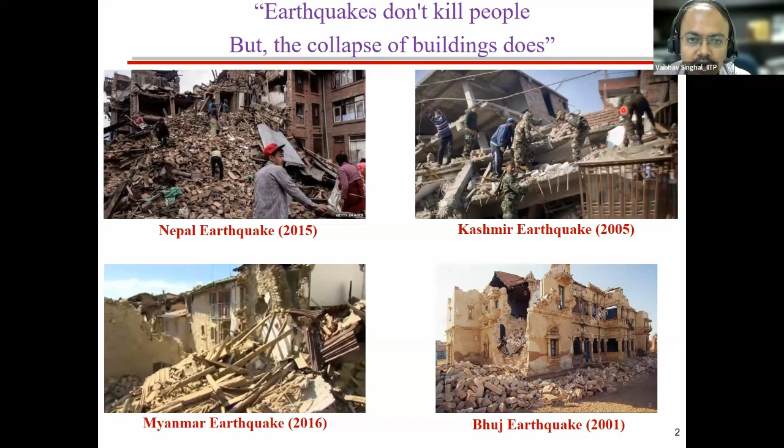Even some of the modern masonry materials which we use for infill — most of you have seen — are participants allowed to speak, Dr. Praveen? No sir, not in between, okay, but they can ask questions later.

For the strengthening of masonry, or of any civil engineering structure, there are many techniques, but they can be classified into two major groups. One is what we call the epoxy-based technique. I'm talking about externally bonded methods, not about improving strength by grouting or other methods. I'll talk about techniques where we apply the strengthening over the surface using a bonding agent. This bonding agent can be epoxy-based — we use various types of epoxies available in the market — or the bonding agent can be a cementitious matrix.

This has become a new material and a new area for research. In the last 10-15 years a lot of work has been done, and many countries have come up with codes for strengthening using the cementitious matrix.

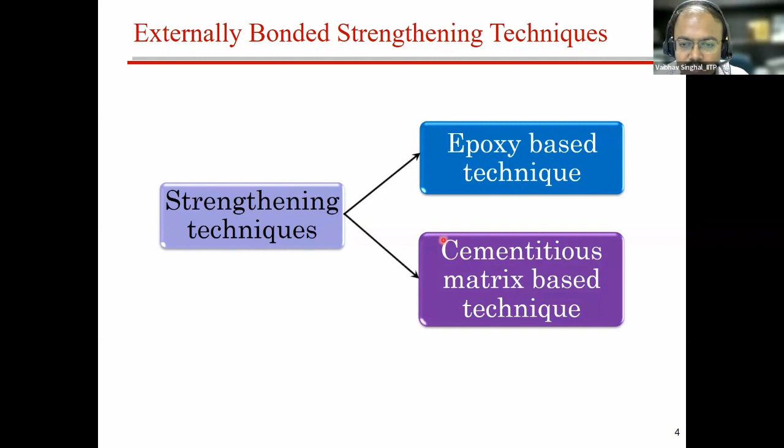Now, why has the cementitious matrix become popular in the last 10 years?

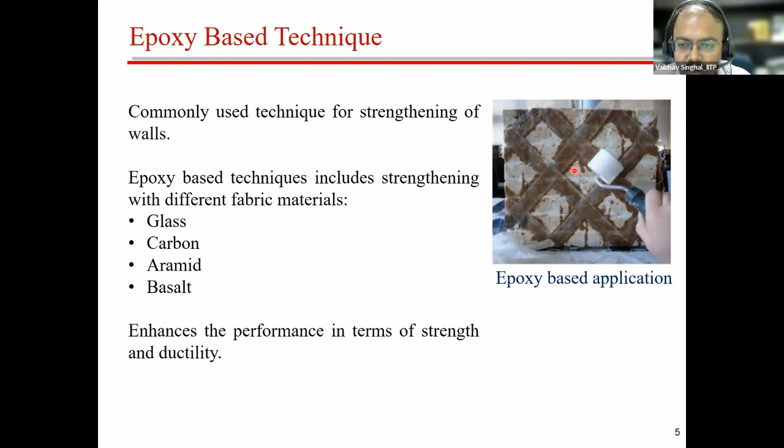The major problem seen especially with epoxy based systems - here is an example of an epoxy based application. You can see a fabric, which can be carbon, glass, or a different material, and it is applied over the masonry surface or any surface using a bonding agent, which is an epoxy based bonding agent.

The major problem with epoxy based systems is the requirement of highly skilled manpower. A normal mason cannot handle the epoxy properly for mixing and application. There can also be emission of toxic gases, and many times the epoxy, especially low cost epoxy, is vulnerable to fire. Also, a lot of surface preparation is needed - the surface should be properly smoothened and cleaned before application of any epoxy based bonding agent.

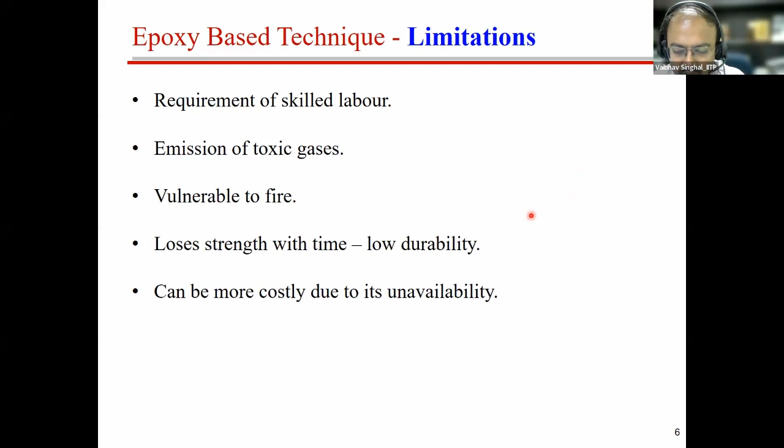There can be different application methods. Let's say this is my masonry surface substrate - we generally apply a first layer of plaster or mortar, then put a fabric over it, and then apply another layer of plaster or mortar. This is kind of a sandwich application, where the fabric is sandwiched between two layers of mortar or plaster.

You can even apply the fabric directly to the surface. So this is my surface substrate, masonry surface - apply the fabric and then apply a plaster over it. In this case, the bonding agent is mortar or a cementitious based bonding agent. I'm not using any epoxy or other glue for attaching this reinforcement to the surface of the masonry or concrete.

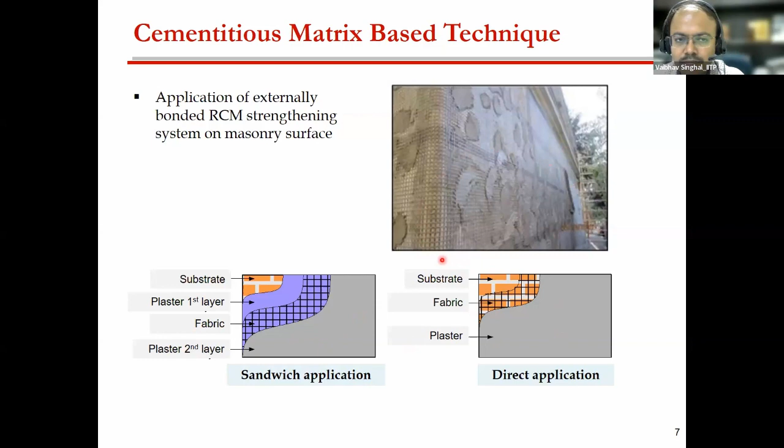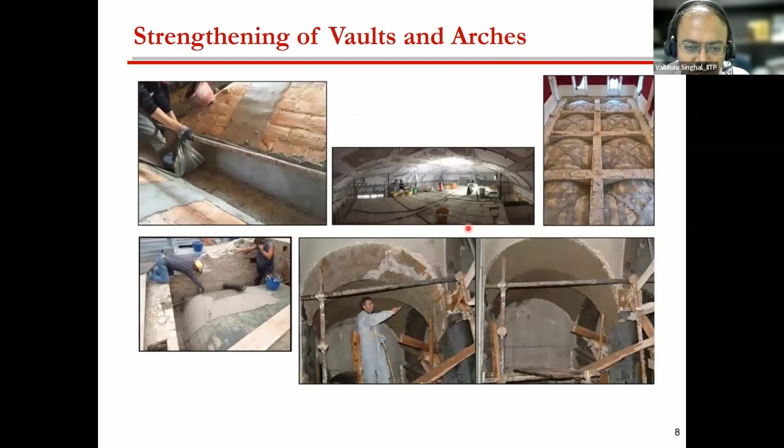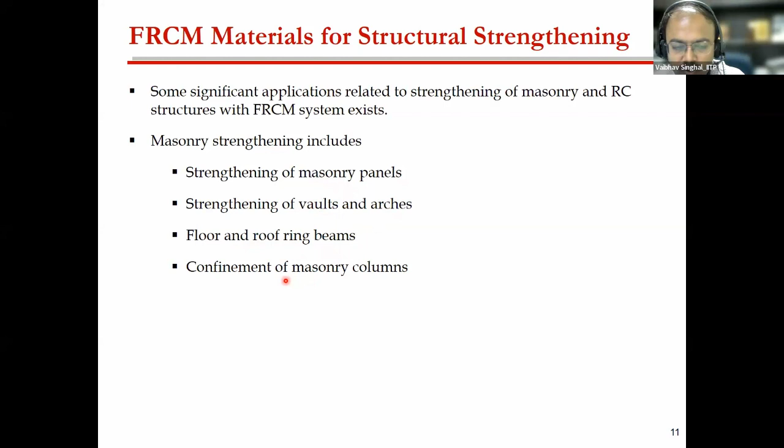I'm just keeping a snapshot, and I know some engineers and research scholars are here - if you are interested, you can go through this code and look at some guidelines, design equations and design criteria for designing this reinforced cementitious matrix. The code suggests it can be used for strengthening masonry panels, walls, arches, floor and roof beams, and even for confinement of masonry columns.

The challenge which lies in all this strengthening technique is that it is simpler to apply - even a mason who knows plastering work, who knows how to put mortar over a wall, can use this strengthening technique to improve the performance of masonry structures. But the major challenge lies in designing this, because the response of this material is more complicated compared to epoxy based systems. That is where researchers are doing a lot of work to find out the properties of this reinforced cementitious matrix.

This is a typical behavior if you test a reinforced cementitious matrix - I will show what tests can be done. It shows a typical tensile response, where stage A is the uncracked stage, then the stage where cracks develop, and stage C where there are more multiple cracks and the fabric or reinforcing material takes some strength. After this point, there can be a sudden or complete failure.

Now, since this reinforced cementitious matrix will be attached to the substrate, which can be masonry or concrete, the bonding between the reinforced cementitious matrix and the substrate will also play an important role in the designing of such a strengthening technique.

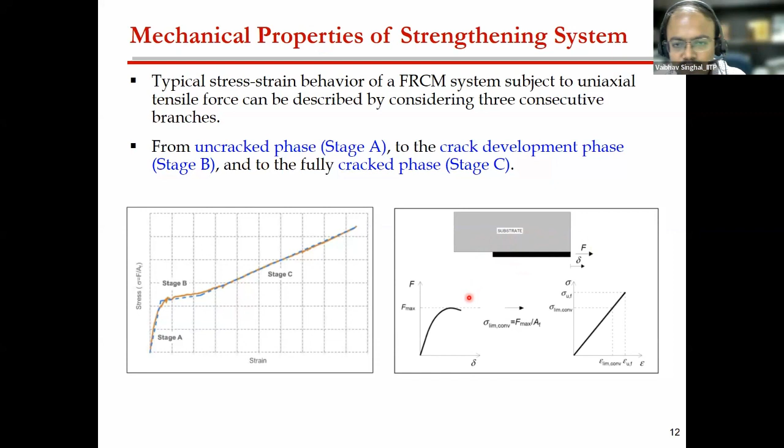Coming to the different tests one can do, you need some advanced testing facility, or you can develop the facility in your labs. The first test is the tensile coupon test, which I will show. Then you have to do some bond tests, which can be a shear bond test, or somebody can even do a pull-off test. We will see what these tests are and how we can determine the properties.

So now I'm moving on from material characterization. Then we will see the performance of this strengthening technique on a small masonry specimen, and we will also see the performance of this strengthening material on strengthening of masonry walls.

So this is the first test, the tensile test, which can be done on the reinforced cementitious matrix. This is a typical coupon or specimen you can see here, with this gray color being the cementitious matrix. One can follow this code, AC434, published in 2011, which can be used for material characterization for the tension coupon.

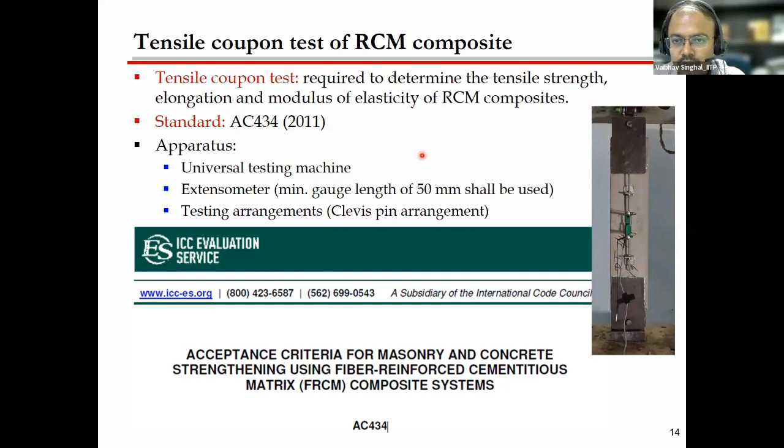Let me give you some of the criteria suggested by the code. It says the shape of the specimen should be rectangular, and the width should be at least enough to accommodate 3 strands - the 3 reinforcing wires or fabric layers - and should be more than at least 4 times the thickness of the specimen. The width should be kept as a multiple of the grid spacing, and the coupon length should be the grip distance plus twice the width plus the gauge length. The longer the specimen, the more preferred, because the bending effect will be smaller.

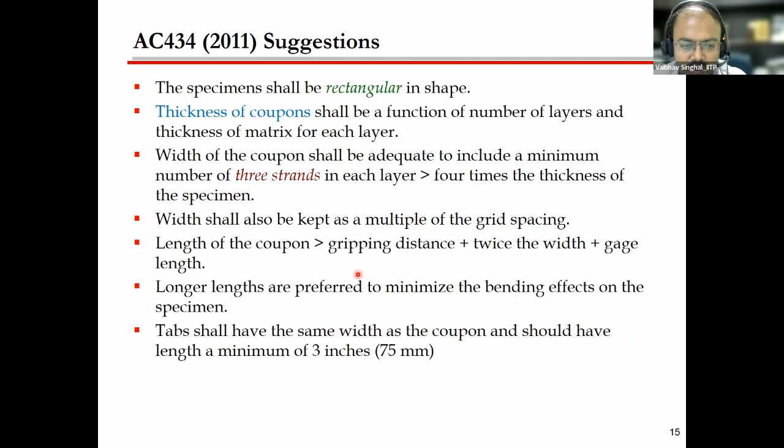So this is another picture from the test which we have done at IIT Patna. Here we have used a coupon of size 100 by 500, and the reinforcement was also cut to that size. First, we took a 5 mm thick layer of mortar, then the reinforcement was placed over it, and then laid another 5 mm thick layer of plaster, and then you can cure it for 28 days, which can later be used for the testing purpose.

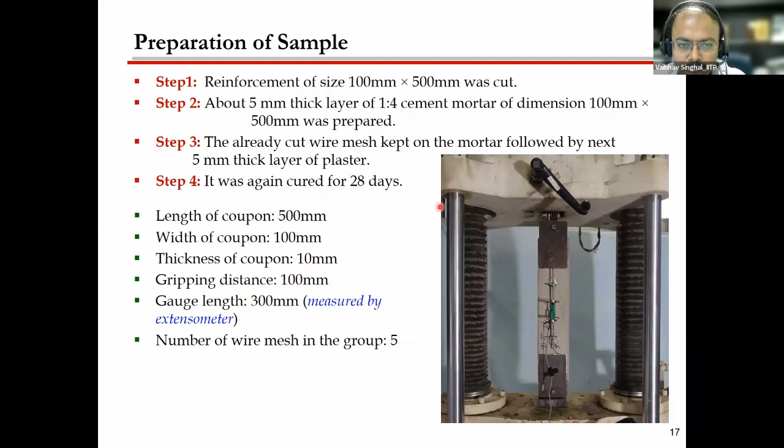Now these coupons, or the failure under tension of the matrix, can be classified into 3 different modes. The first mode is where you have failure of the reinforcement or failure of the matrix. In the second mode, there can be multiple cracks, and there will be a failure of your reinforcing material, which can be a fabric or a wire mesh. Another failure can be a bond failure, where the fabric or fiber will simply slip inside the matrix, and there can be multiple cracks, with the failure ultimately being because of debonding of the fiber or reinforcing material from the matrix.

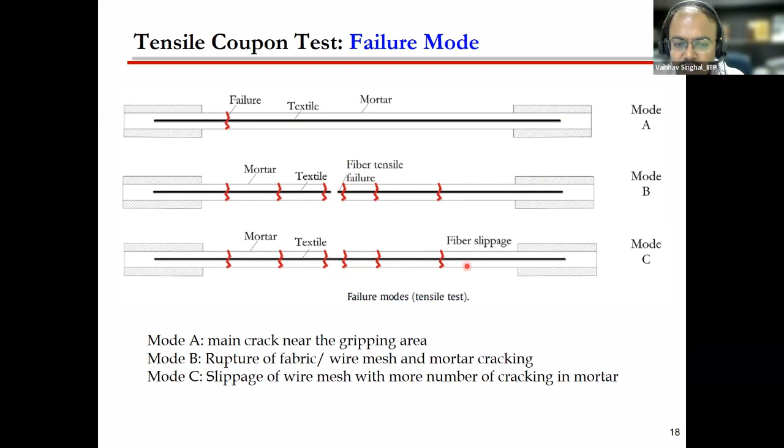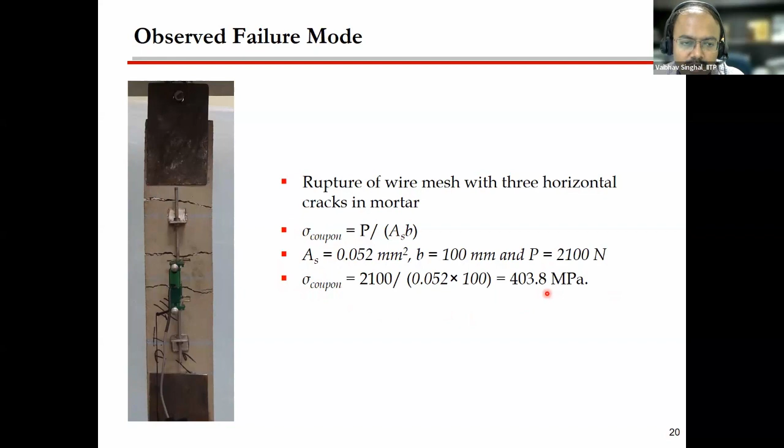Now this is the failure which we have seen when we did the testing at IIT Patna. You can see the multiple cracks seen in the coupon specimen, and using the peak load you can find out the ultimate strength of this reinforced cementitious matrix. Here we used the steel wire mesh, and the strength was coming out to be nearly equal to the yield strength of the wire mesh, which is about 403 MPa.

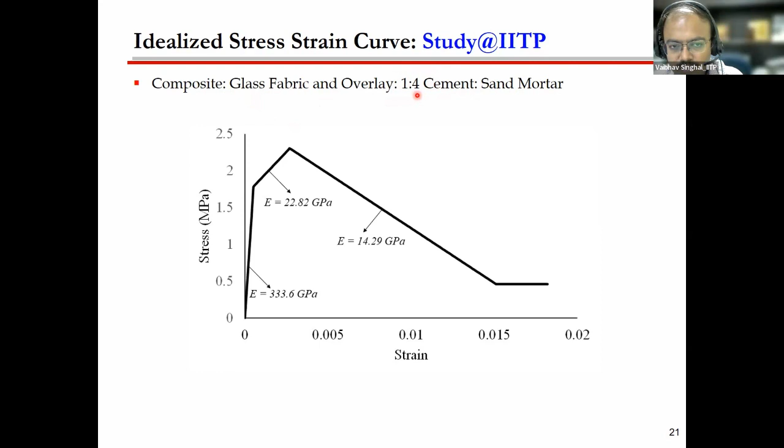Now the second test, which is also quite important, is to find out the bond, because all these reinforcing methods or materials are externally bonded to the surface. So it is important to know how well they will bond with the substrate or surface. There are various tests you can find in literature, but till now there are no standards or codal provisions available for this shear bond test or bond test for externally bonded reinforced cementitious matrix.

So few tests I am highlighting here, which you can find in literature. The first test is called a single lap shear bond test, and the last two are called double lap shear bond tests. In the first one, there is only a single brick, or you can see there are two surfaces of bonding. In the second one, there are four surfaces of bonding. So the first is called a single prism and the other is called a double prism.

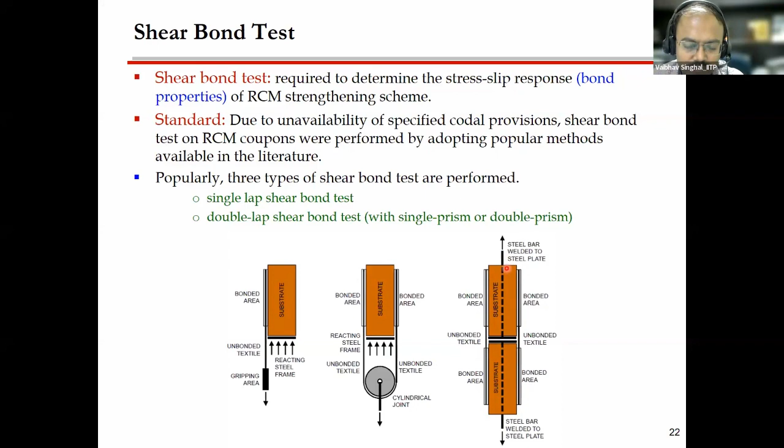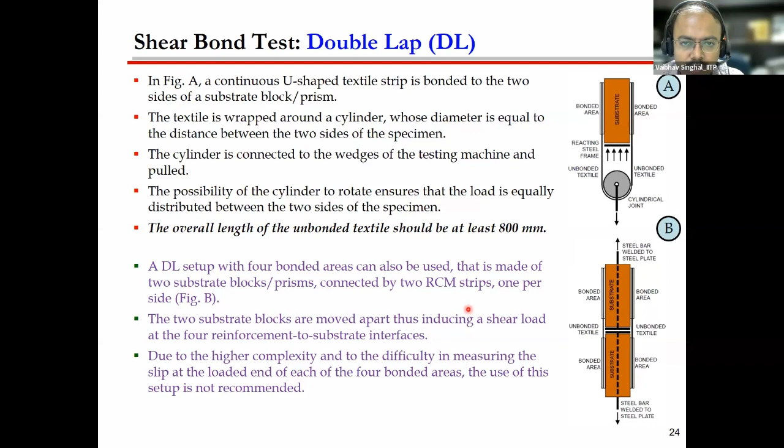Single lap shear bond test is quite easy, you can do it in the lab, you can develop a setup. So this is the setup we developed at our lab to find out the bond strength. The double shear or double lap test can also be done, but the testing setups are more complicated and more challenging. So we kind of adopted to go with the single lap shear bond test.

Based on the literature, we developed our own setup. From literature, we find a wide range of specifications, wide range of specimens which they have used. So this is how a typical single lap shear bond test specimen looks like. You will have some bond length and some unbonded length, and then some gripping length which is used for pulling it in the upward direction.

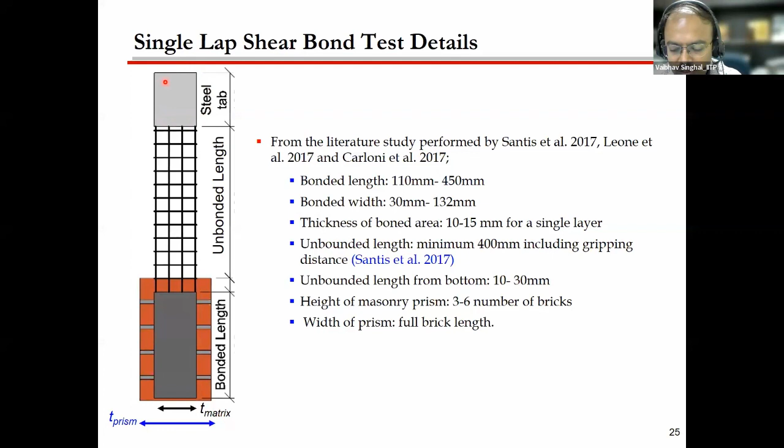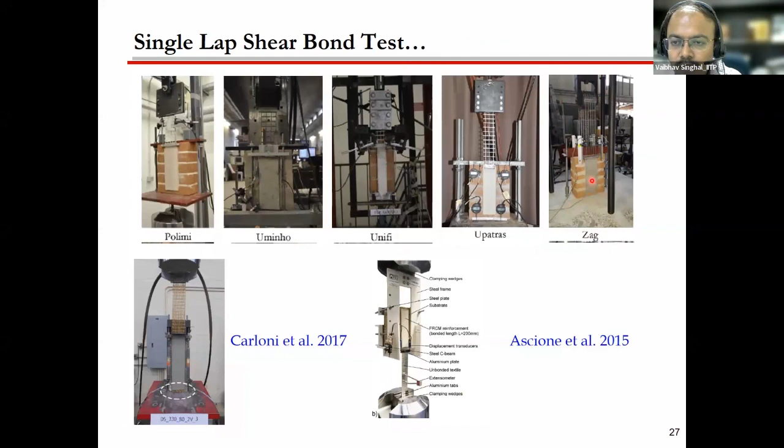Okay, coming to more details. The presentation file I will share, you can find some more details on what dimensions we adopted in our own lab, and which can be modified to develop this single lap shear bond test.

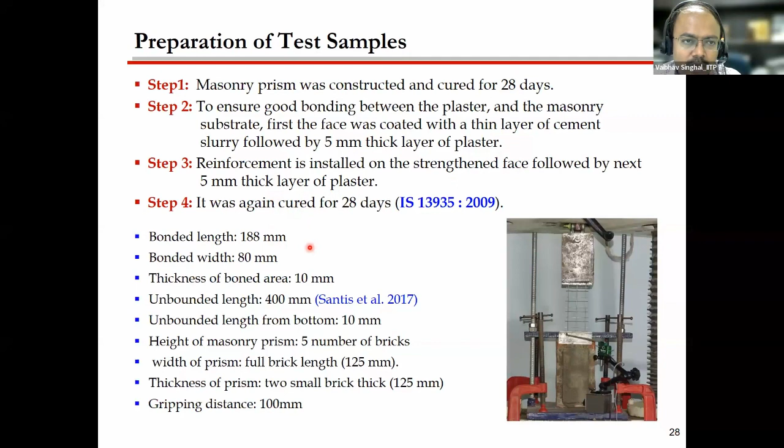Now here we have done the test with the steel wire mesh. The failure which we have seen is the tensile rupture of the wire mesh before the debonding failure.

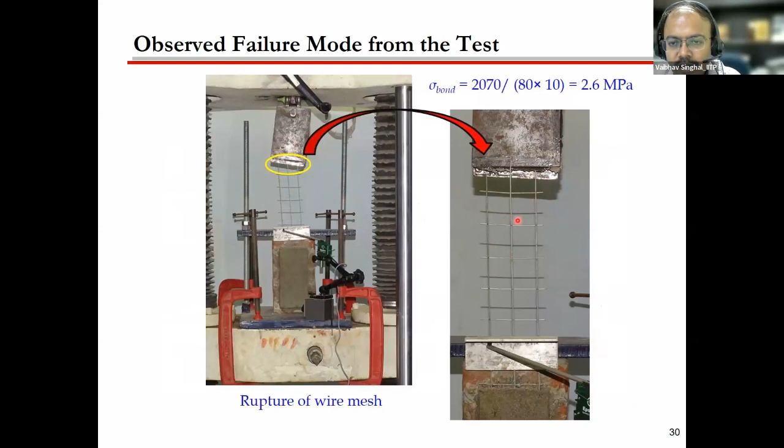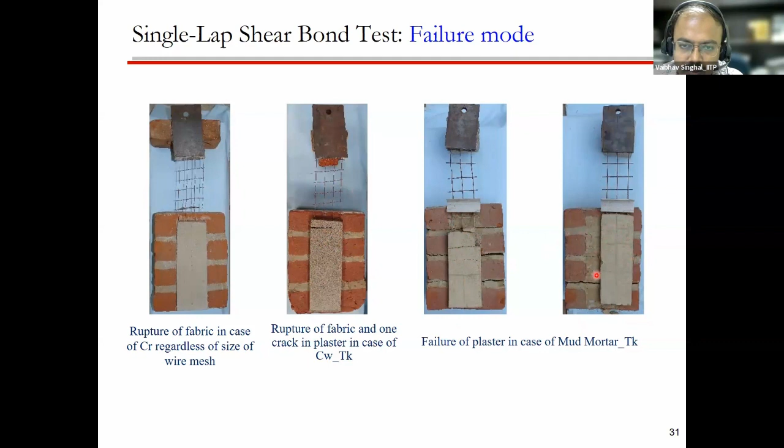Now, using this test, you can find out how much slip is expected at the design forces, at the design level of force. So this is quite an important test, which can give you an idea about the relationship between the bond stress and the slip.

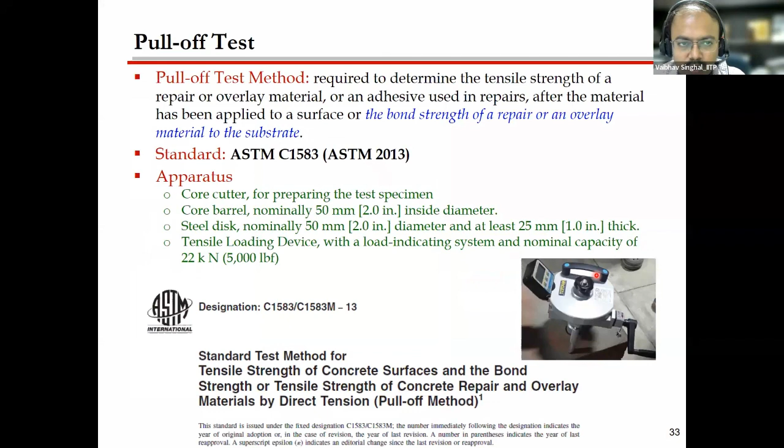Now, if suppose you are unable to perform the bond test using the previous setup, there is another popularly used method, the pull-off test. This pull-off test needs some specific equipment. Generally pull-off testers are available in various labs. So if you have this pull-off tester, you can use this pull-off test to find out how much is the bond strength between the matrix and the substrate, or between your reinforced cementitious matrix and the substrate. So this is a typical equipment you can see here.

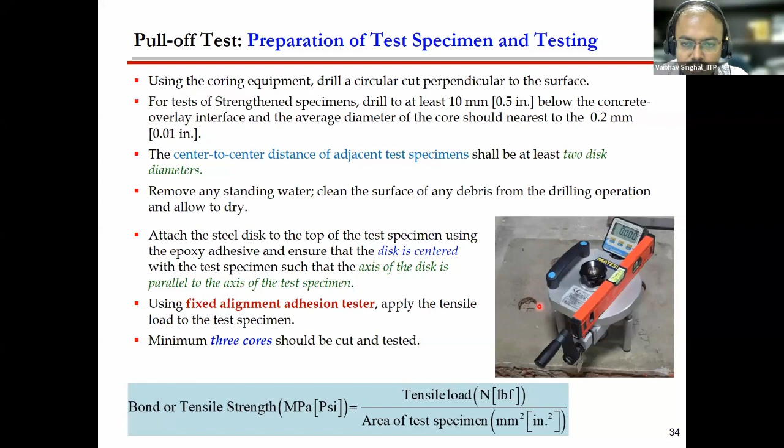So what is done is we cut a core inside the reinforced cementitious matrix and till some depth of the substrate, and then a disc is attached to this core, and this disc is pulled in the upward direction. And then we notice what are the different failure modes, and the strength at which this will fail will be divided by the total area. You will get the bond strength.

Now here also you can have different failure modes. The first failure mode is in the substrate. If the failure is in the substrate, you can say the bonding is good. There can be a failure between the cementitious matrix and the bonding and the substrate material. You can have a failure between the overlay, or within the matrix itself. And then you can have also the failure between the attachment and the surface.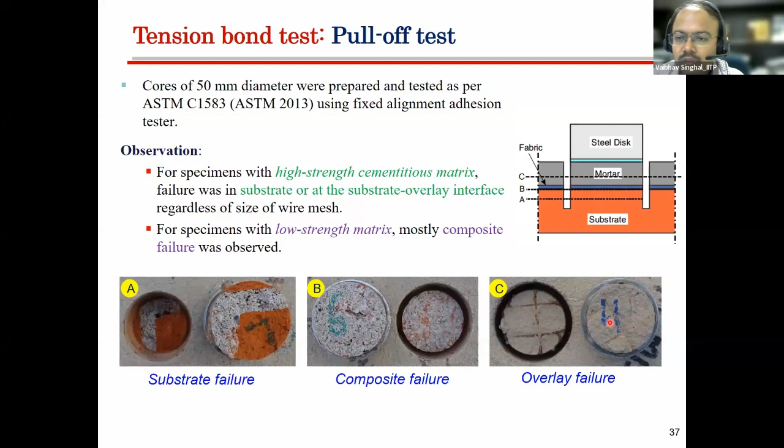Now, all these results can finally be used to find out how much will be the effective strain or the effective stress that the reinforcing material or the reinforced cementitious matrix will take in my strengthening method. So what is suggested is using the bond strength test, you find out how much is the bond strain, and for that, take that bond strain and also the strain of your reinforcing material, whether it is steel or any fiber, carbon or glass.

And then you find out the minimum, and this minimum strain should also be less than the strain which you have calculated from your tension coupon test. Using this, you can find out how much is the effective strain my reinforcing material or reinforced cementitious matrix can take. This can then be multiplied by your modulus, and you can find out the effective stress in your reinforced cementitious matrix.

So this is how, and that is why I have mentioned all these tests which can be used to find out what could be the effective stress or effective forces which my strengthening method or strengthening layer will take.

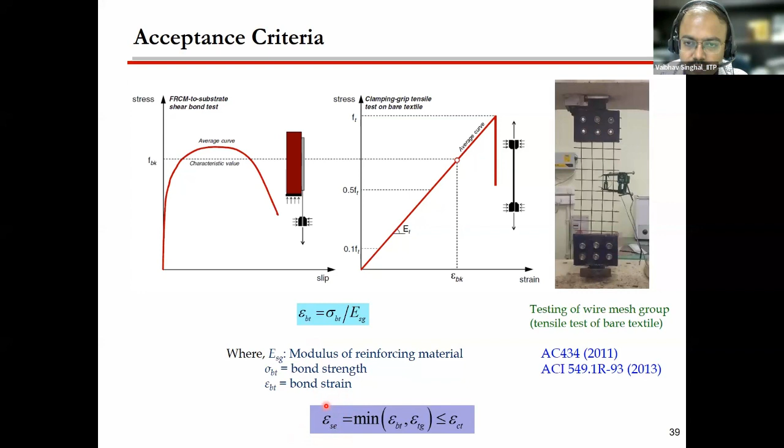Okay, so these are some of the summary. We have done a lot of tests in the lab with different types of reinforcing material and different types of cementitious matrix. It is generally seen that if you use a larger amount of reinforcement and your cementitious matrix is of lower strength, then debonding will be the common failure mode.

So it is suggested that you have to use an appropriate size of reinforcement and also use a good strength of cementitious matrix, something like at least 1:3 or 1:4 cement sand mortar for strengthening using this method. By performing various tests on the reinforcing material, tensile tests on the coupon of the reinforced cementitious matrix, and the shear bond test, you can find out the effective strain, and ultimately you can find out the effective stress.

So the design, you can think of it like the design of a reinforced concrete material. We find out the yield strength of a material, we see how much bond strength is available, whether there is sufficient bond strength or not, and accordingly we provide the development length.

So all these design concepts will be also applicable for this reinforced cementitious matrix. You need to find out the bond strength, you need to find out the tensile strength, you need to find out the material strength to get the effective stresses which can be taken by this strengthening material.

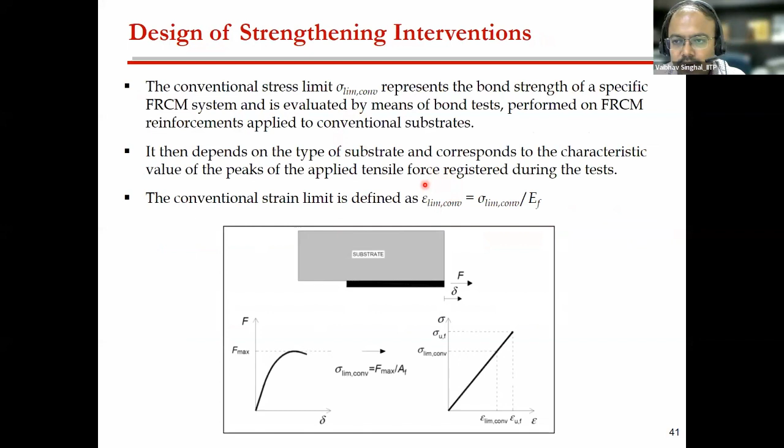Okay, so just let me highlight some of the design equations. Similarly, by performing all these tests, you can find out the limiting value of strain, and this limiting value of strain will be further used to find out the design strength.

Now the code suggests - this is from CNR-DT, from the Italian code - different factors also. If the material, the reinforced cementitious matrix, is exposed to external environment or to an aggressive environment, it is suggested to use some factor of safety also.

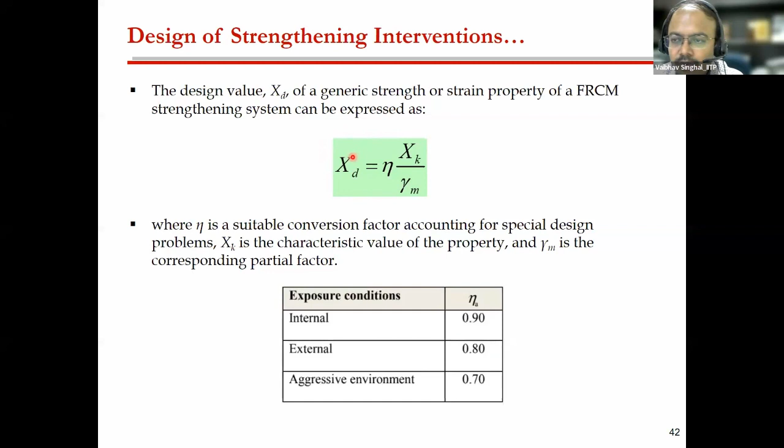So it is suggested for external application that you have to take this value of eta as 0.8. This xd is the design strength or design strain which can be used for further finding out the capacity. This is the equation which is suggested by the Italian code.

So these are some of the pictures showing the various components - what is meant by L, what is meant by H. So for giving the direction of load, you have to choose the correct height and correct length.

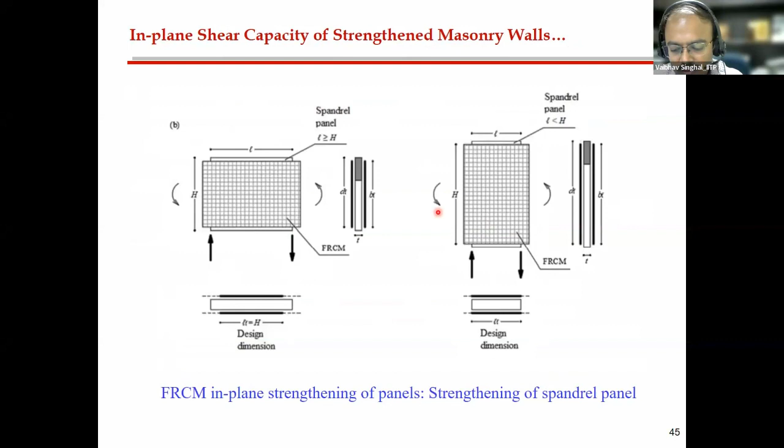So the code also says that the total strength should not exceed the diagonal compression strength or diagonal crushing strength of your masonry. Otherwise, if you provide too much reinforcement or too much strengthening, it will not be very effective, because the masonry has a limited crushing strength and masonry can crush inside, whereas your strengthening scheme will remain intact. So it is something like we try to avoid over-reinforced design in concrete.

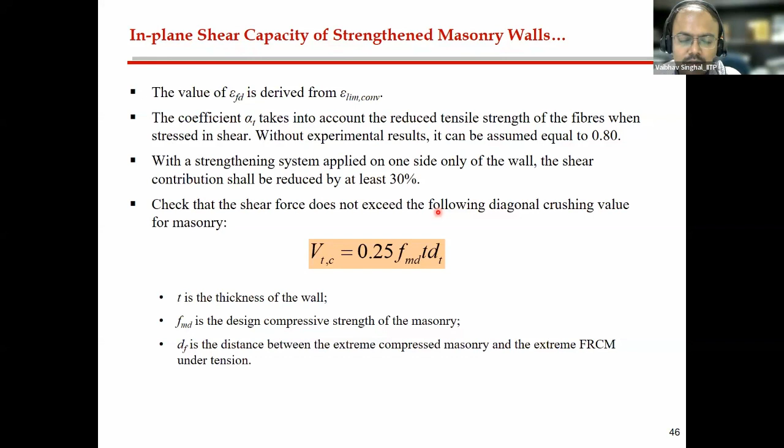Similarly here also, we don't want to provide an excessive amount of strengthening, because the masonry will fail early, before the failure of your strengthening material.

So after finding out this VF - VF is the contribution of the strengthening material, in this case the reinforced cementitious matrix - you add this with the strength of your masonry and you can get the total strength of your masonry wall or any component, any member, with reinforcing or strengthening material.

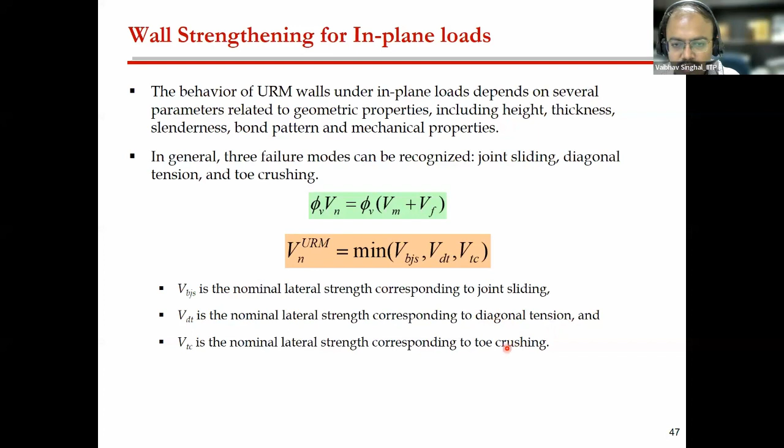Now to find out the strength of masonry, there are different methods. One method is you find out, considering the minimum of different failure modes of masonry: failure because of sliding, because of diagonal tension, because of toe crushing, which is shown here. So these are the common 3 failure modes for masonry.

So you have to find out the strength for each failure mode and take a minimum of that, find out the contribution of masonry, add it to the contribution of your reinforcing method, and then you can find out the total strength of your wall, column, or any structural member.

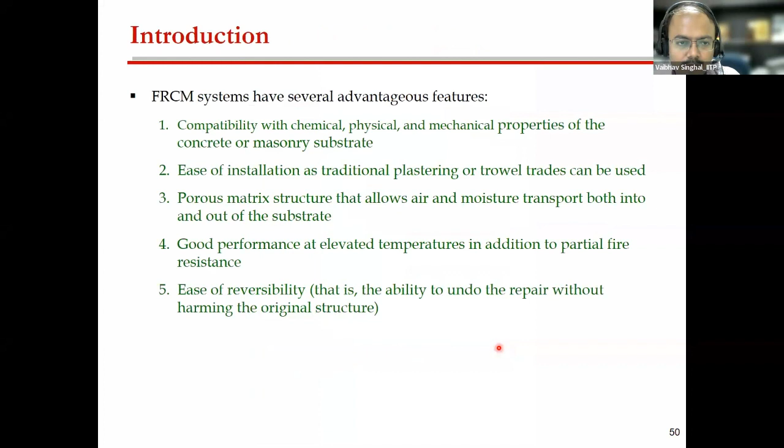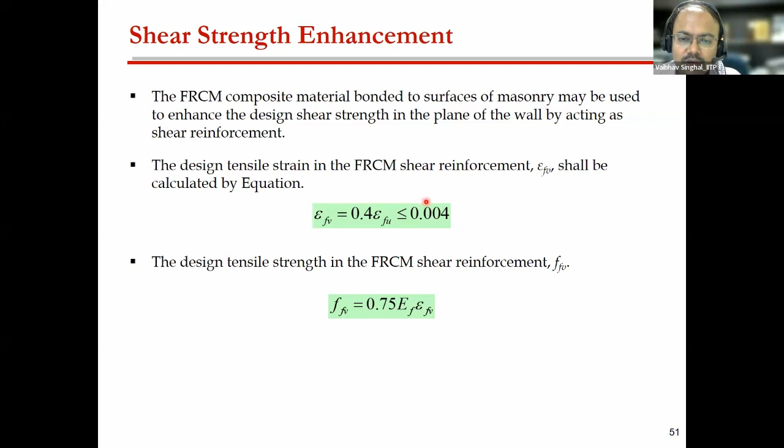Now this is another code given by ACI. Recently there has been a revision, and they have given a lot of recommendations on how to design these externally bonded reinforced cementitious matrix systems. I will not go into detail, but one important factor they suggested is the effective strain, taken as an upper limit of 0.004. But secondary thought is required here, because from many tests and literature data, this value seems quite low, and it would cause a good amount of underestimation in strength if we use this value in design.

So the equation suggested by the American code is quite easy compared to the Italian code. They have a very simple equation using FFV, which they call effective stress—how much stress the reinforcing material or reinforced cementitious matrix can take—multiplied by the length and area. N is the number of layers of reinforcing material, and they use a factor of 2 if applied on both sides. If not applied on both sides, you simply take it as 1.

So in the first phase, we saw how to characterize the reinforced cementitious matrix. Now in the second phase, I will show you how this reinforced cementitious matrix can help improve the strength of small masonry specimens.

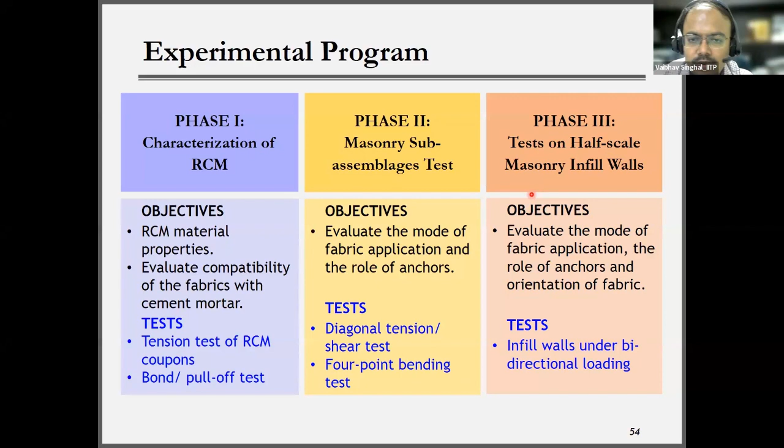One of the studies I'll quickly go through was done on autoclaved aerated concrete block masonry. We have seen that AAC blocks or AAC masonry have also experienced a lot of damage, and we wanted to see how this reinforced cementitious matrix can improve the performance of this AAC masonry.

So we decided to perform simple tests: a flexure test where failure is parallel to the bed joint—you can see this failure mode—a flexure test where failure is perpendicular to the bed joint, with failure expected like this, and then a diagonal compression test to find out the shear, or indirectly the tensile strength, of masonry.

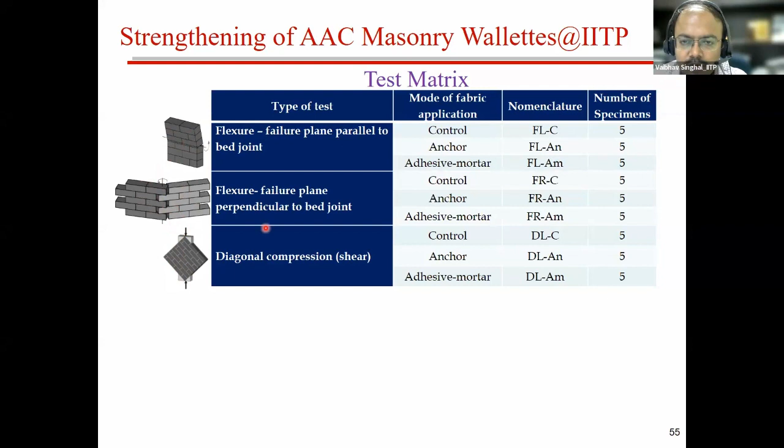So we had control specimens where no strengthening was used, and two types of strengthening techniques were adopted. The first one uses anchors, where the fabric is attached to the surface using anchors to avoid debonding. In the next case, we used adhesive mortar, thinking it would provide better bonding.

This adhesive mortar is nothing but the mortar commonly used for laying AAC blocks. You might have seen this adhesive mortar given by various companies like Ultratech and others—sometimes they call it polymer mortar. For each case, we had five specimens.

This is the fabric we used, the main fabric having a grid spacing of 25. This fabric was placed at the edges because we wanted the anchors to be easily placed. For easy placing of anchors, we used this fabric at the edges, having a small grid spacing of approximately 8 and 10 mm.

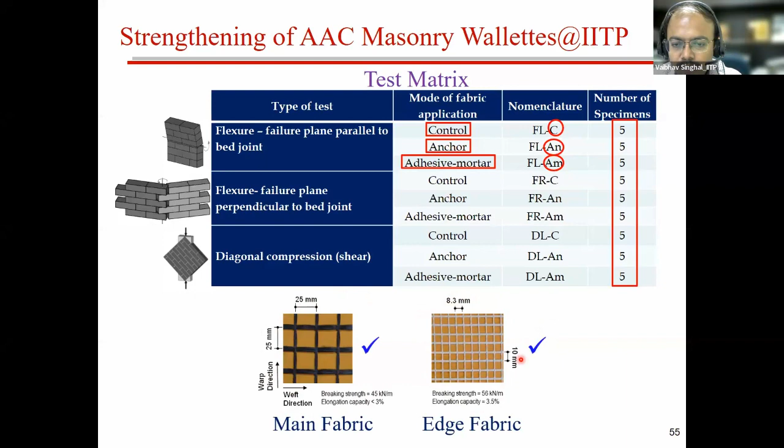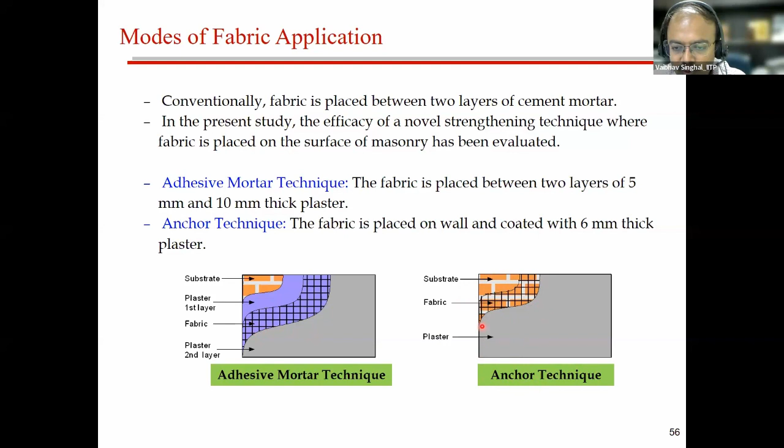So two types of techniques were used. In the first case, we applied a layer of adhesive mortar, the polymer mortar, then put a fabric over it, then another layer of simple cement mortar. In the second technique, which I'm calling the anchor technique, the fabric is directly placed over the surface, then we install anchors at a few locations and cover it with plaster. I have some actual pictures I'll show you, and these are some tests done on AAC masonry.

This is the compressive strength of AAC masonry. We found it to be 1.8, and the tensile strength is 0.13 MPa.

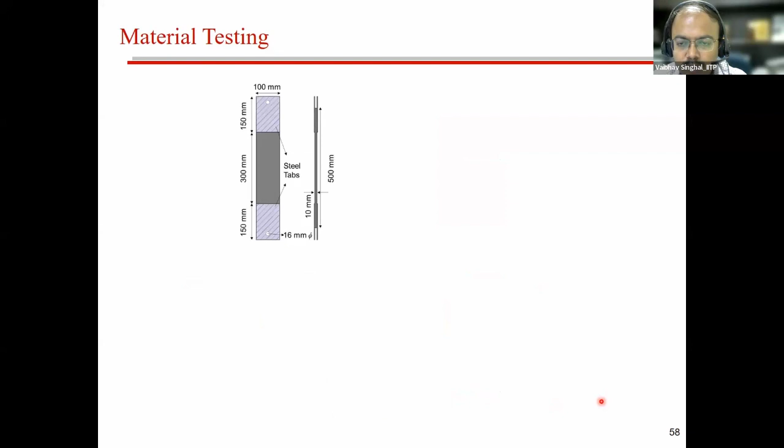Some bond tests were also done for different strengthening techniques. It comes out to be approximately 0.41 MPa. So these are the tensile tests.

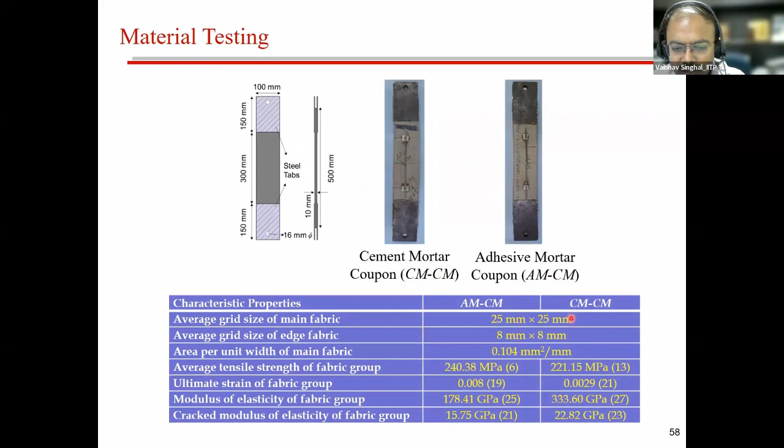Tensile tests were done on two types of strengthening techniques, where the fabric is embedded inside the cement mortar, kind of a sandwich between cement mortar on both sides. In another case, it is sandwiched between adhesive mortar on one side and cement mortar on the other. We found nearly similar properties for both cases, so there was no significant difference between the adhesive mortar and the cement mortar.

This is what I was talking about, called the anchor technique. You can see this is a plain surface of masonry. We first applied the main fabric, and over the main fabric we have the edge fabric, and then the anchors. These are simple anchors—you can use a simple nut and washer assembly as an anchor. Then we directly applied a thick layer of mortar, 15 mm.

In the other technique, on the masonry surface we applied the fabric. We kept the edge fabric also, just to have similarity with the anchor technique, and then applied the polymer adhesive mortar so that the fabric properly adheres to the surface. After drying, we applied the 10 mm thick cement mortar.

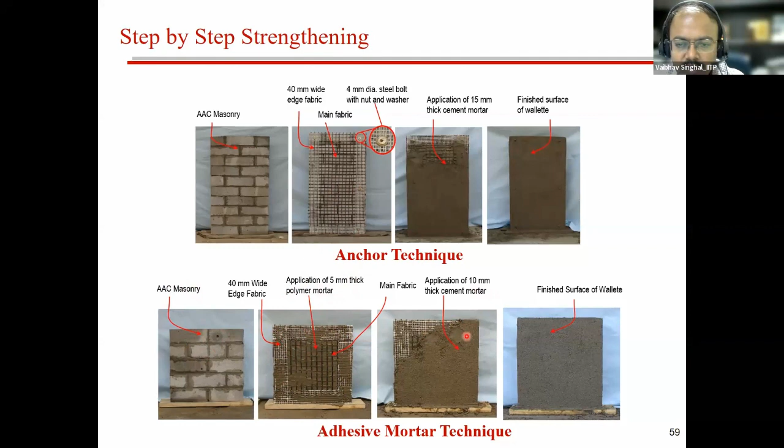These are the responses of the flexure test. The first one is for the control specimen, with no strengthening. It was expected that the control specimen, which is not strengthened, would have a very low capacity compared to the strengthened ones.

Both strengthening techniques—AN for anchor and AM for adhesive mortar—performed well, giving nearly the same improvement in flexure strength, both perpendicular and parallel.

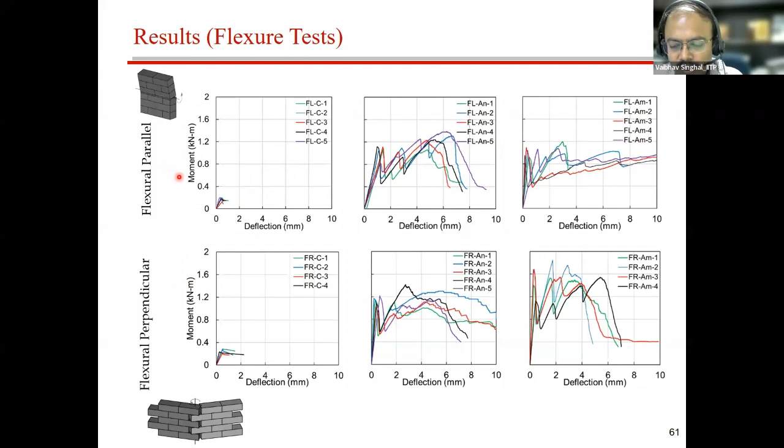These are the results for the diagonal compression test. Again, it showed quite similar results for both techniques, the anchor and the adhesive mortar.

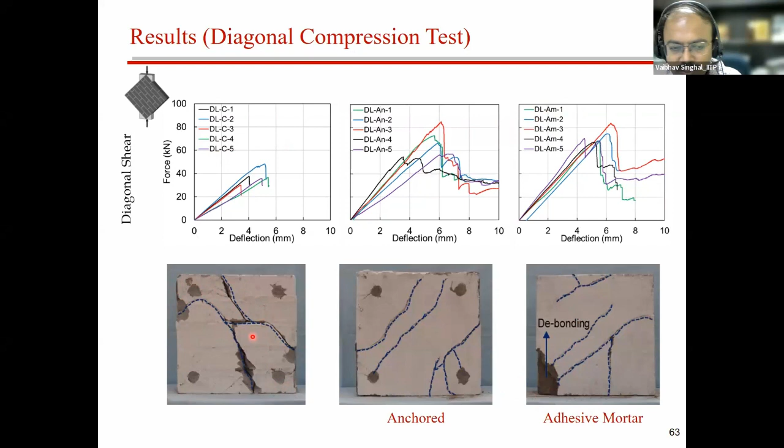This is how the failure was observed. Again, with the adhesive mortar, as you can see at the bottom, debonding was observed. The control specimen failed suddenly, showing complete disintegration when tested without any strengthening.

This is a comparison of the strengthening techniques. D is the anchored one, applied directly, and A is the adhesive mortar. You can see both bars are almost the same height, giving comparable results. The only issue with the adhesive mortar, without anchors, is that debonding can occur at different places.

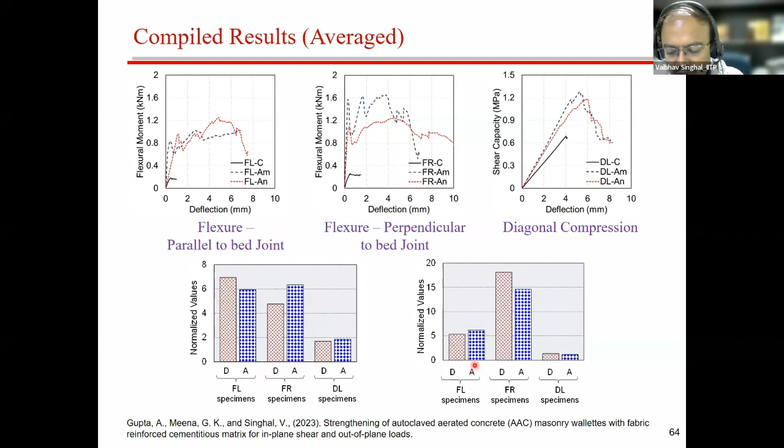All these results have already been published, so if you're interested, you can go through them in detail.

Now, moving from the small tests to the major tests on walls. Here we tried to improve the performance of masonry infills used in reinforced concrete frames. We have seen that during earthquakes, masonry completely falls out of the frame because of poor bonding and poor tensile strength.

This study was done at IIT Kanpur when I was working as a postdoc there, where we tested 6 half-scale masonry walls with reinforced concrete frame and masonry infill. All were half scale, and the RC frames were simply designed as ordinary moment resisting frames.

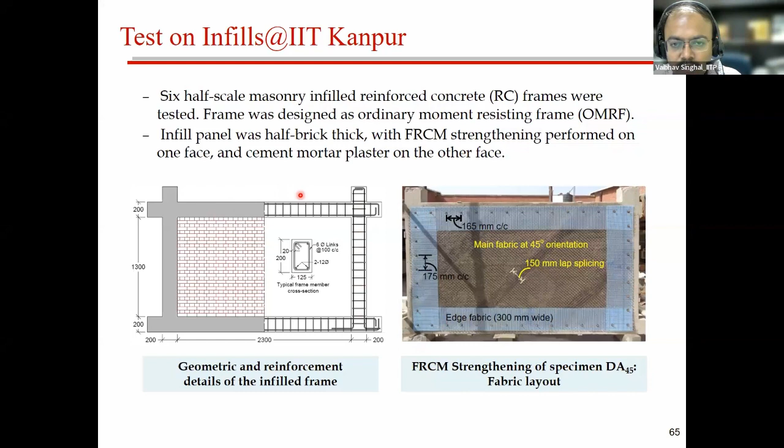So they are not designed as a special moment resisting frame. So we choose the FRCM, the fabric reinforced cementitious matrix, for the strengthening of these

Walls, masonry infill walls. We have chosen 2 different techniques. First was the sandwich one, where the fabric is sandwiched between 2 layers of plaster. The first layer of plaster was 2 mm, then we applied the fabric, and another layer of plaster was 4 mm. In the direct method, we directly applied the fabric over the surface and then put a plaster of 6 mm total thickness. So the total cementitious matrix thickness was 6 mm throughout for all the specimens.

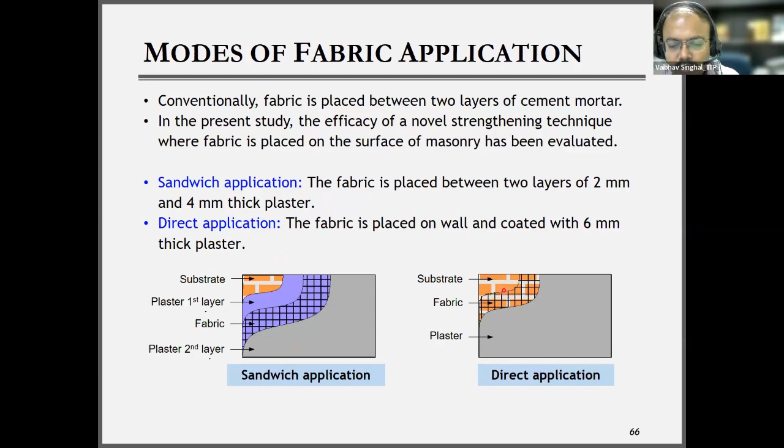Property wise, both fabrics had nearly the same material properties, same tensile strength and same properties. Only the spacings are slightly different. The main fabric has a spacing of 25 mm and the edge fabric had a spacing of approximately 8 mm.

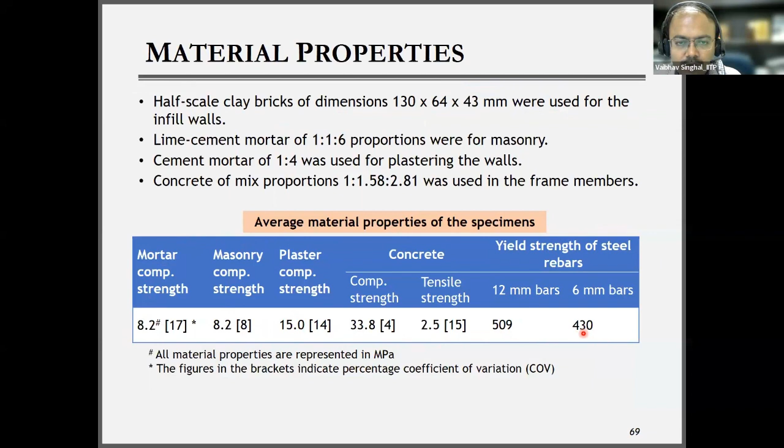These are the properties of masonry. Masonry mortar was having a strength of 8 MPa. The compressive strength of masonry we also got at around 8 MPa. The strength of the plaster or the mortar used for the plaster was 15 MPa. These are the properties of the concrete, and these are properties of the reinforcing steel used for the construction of the reinforced concrete frame. Now this is the test setup.

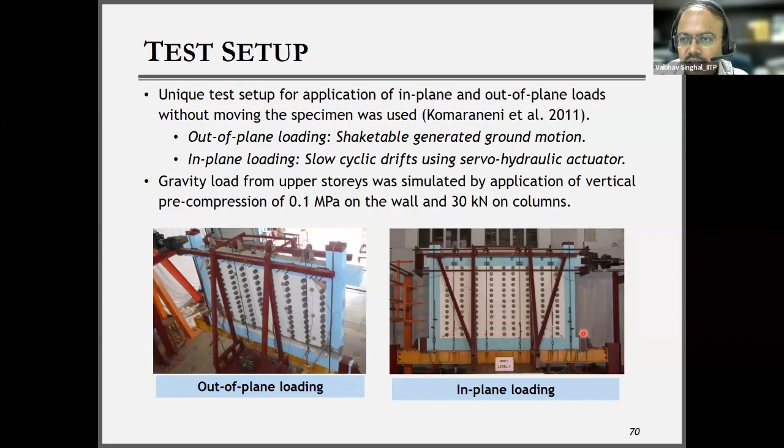Here we have used a very unique test setup, where the specimens are subjected to a sequence of in-plane and out-of-plane loads. The objective was to see the performance of a masonry wall when it is damaged, especially if any damaged wall is subjected to out-of-plane shaking, it is more vulnerable to complete failure. So we put some damage to the wall and then did a shake table test to see how it would perform. That is what we have done.

So this is the sequence of our testing, this was the loading protocol. First we did the out of plane loading, the wall was shaken in the out of plane direction. We did this without any damage first, just to see whether the wall is stable without any damage or not.

And we applied the ground motion in increasing levels of shaking, so you can say we first applied for zone 1, zone 2, zone 3, zone 4, and zone 5, like the zoning system we have in India. Of course there is no zone 1, but we started with zone 1, 2, 3, 4, and 5. And then after that, we recorded all the displacement, accelerations, and other responses.

And then we applied some in-plane load, till we observed some cracks, some damage. And then again we applied the out-of-plane loading and continued the sequence of in-plane load, then again out-of-plane load, till complete failure.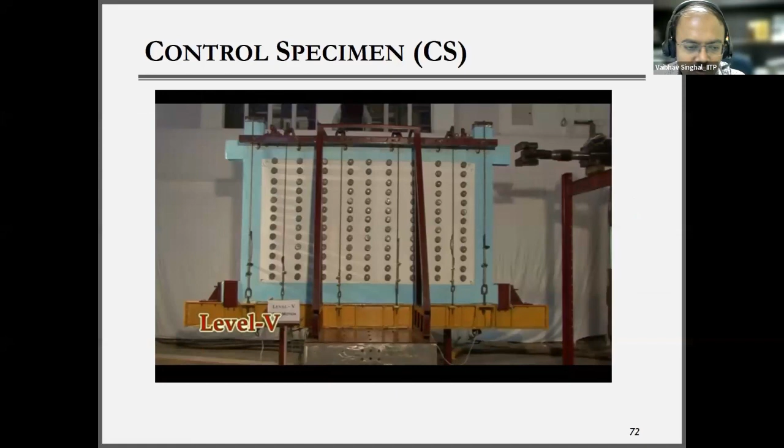So first you have seen the out of plane shaking, you can see the wall was kept over the shake table, it was shaking. Now in-plane damage, you can see there are some damages, some cracks, and then again the out of plane shaking.

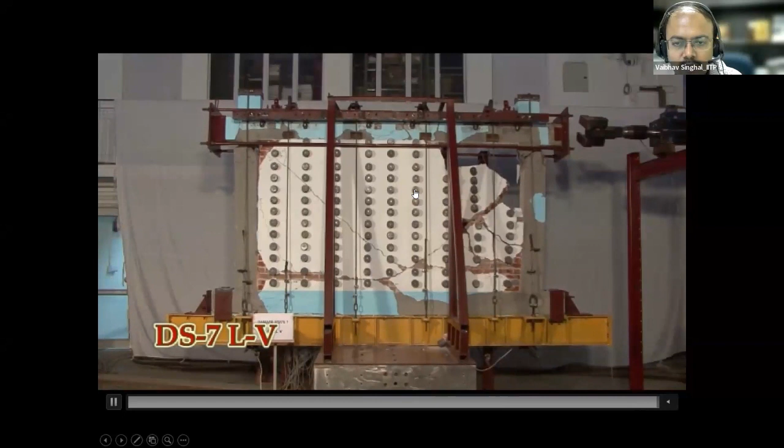So in the next cycle, you will see the wall has been almost dismantled, or it has been coming outward. Because of some of the restraint, because of the out of plane support, the complete failure we have not seen, but the wall was almost on the verge of a complete out of plane collapse. So this is the response of a control specimen.

In the control specimen, the first curve shows you the in plane response, and the second curve shows you the out of plane displacement response. We have seen a large amount of out of plane displacement with the in plane damage. You can see that the displacement was going more than 10 mm, and even for a higher cycle, which I have not plotted here, the displacement was quite high, even more than 30-40 mm. And if you will see, this S letter shows the separation of masonry from the frame.

We have seen a very early separation, even at a very small drift, the masonry has been separated.

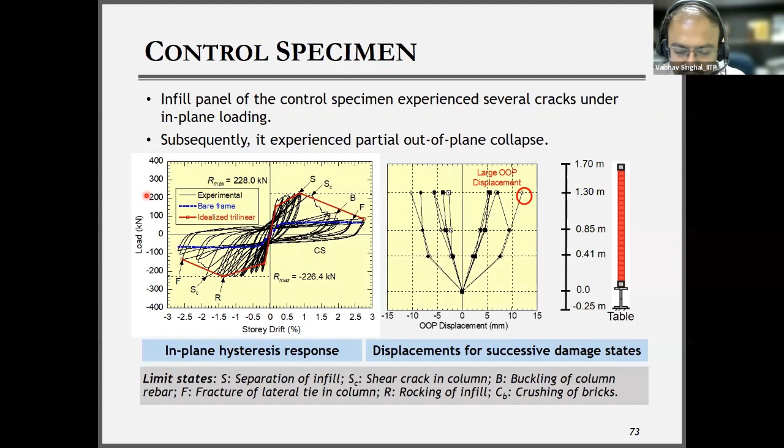So this is a response of a wall with no strengthening. Now this is the next one.

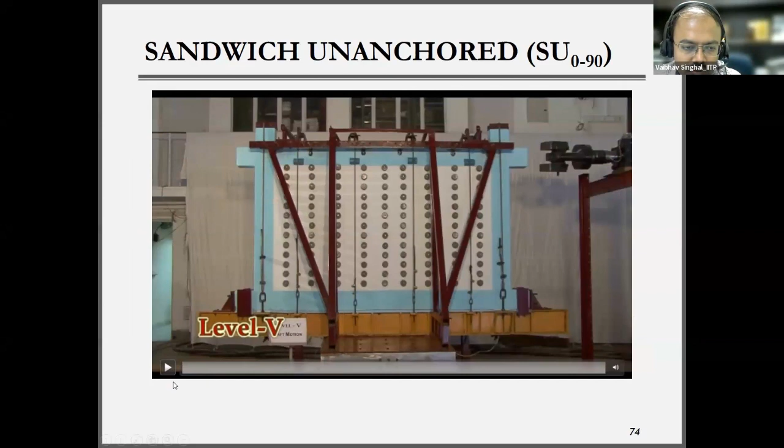This is a response of a wall which is strengthened by using the sandwich technique, where the fabric is sandwiched between two layers of mortar. And this is for an unanchored case, so there are no anchors used. Let me play this.

The response was better than the control specimen, but what we have seen is that because there were no anchors, there was an early separation of the wall from the RC frame, from the reinforced concrete frame.

Now you will see here, if you look at the bottom corner, during the in-plane loading, the plaster is completely... the masonry is simply moving, and the frame is... you can see there is a lot of slip, or you can see the debonding of the plaster. So here is the response.

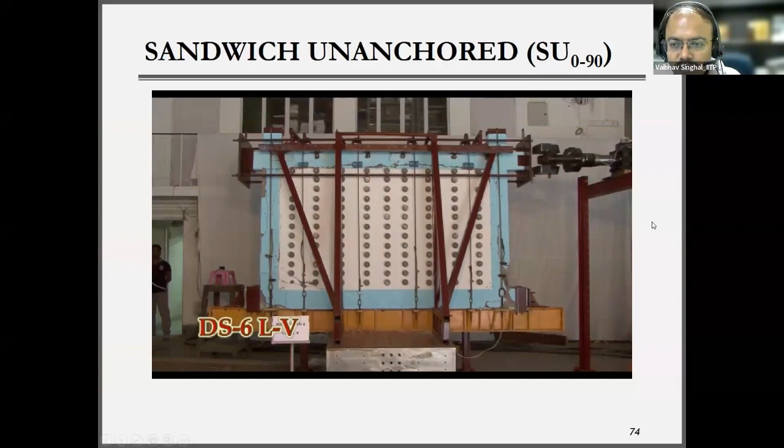There was some improvement in the strength, but no significant improvement. The problem was that the strength, after reaching the peak, reduced suddenly, and also there was an early separation from the frame.

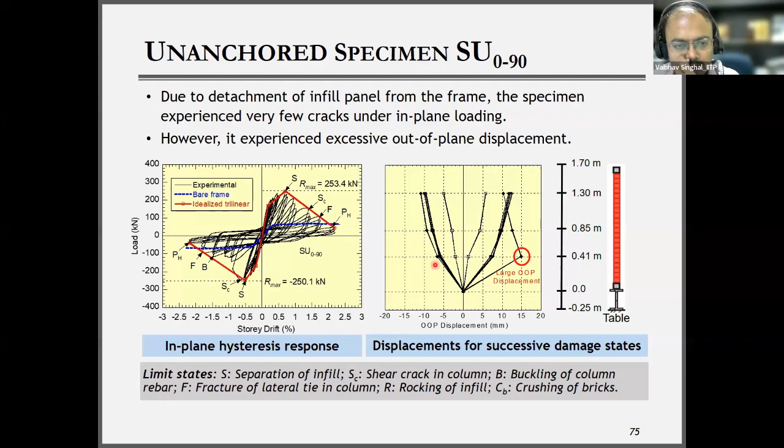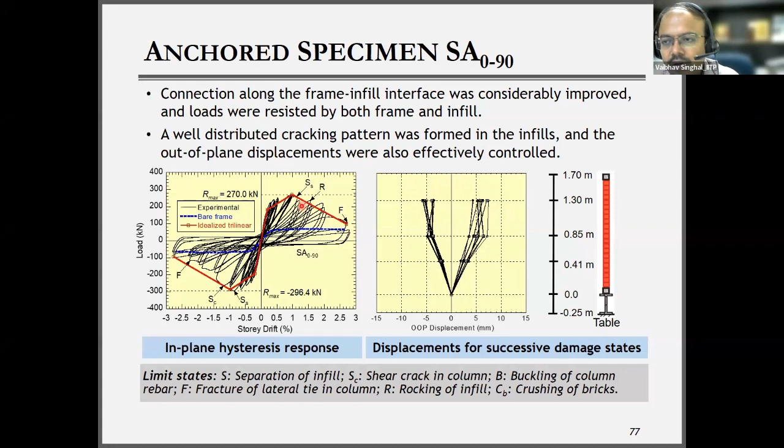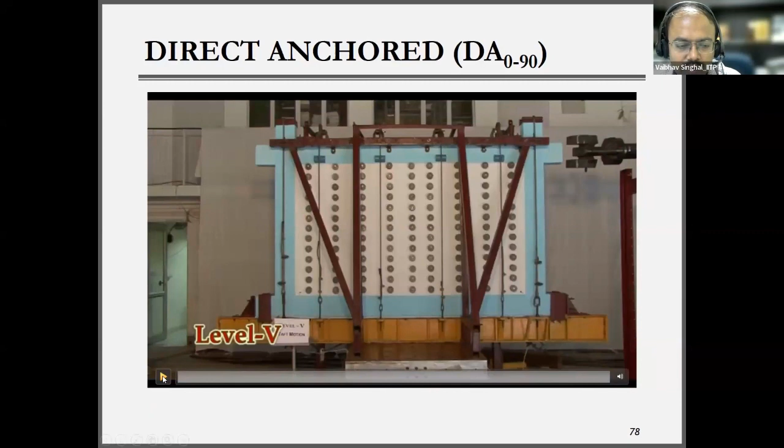Yes, so this is a video for the anchored one. Now you will see a better response of an anchored one, and you will not see the separation of a masonry from the surface. And the cracks were also more uniformly distributed in this specimen compared to the previous one.

So under the out of plane response, there was no damage, no excessive deformation. And you will see the first time there is a horizontal crack. This is happening because the masonry is also contributing. The masonry is also taking a good amount of forces, and it is also participating in taking the in-plane forces.

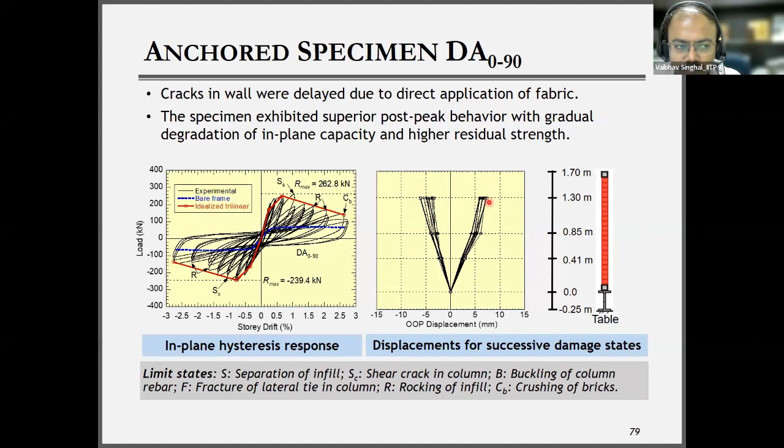And this is the response of a specimen having the fabric at an angle of 45 degrees. This specimen gives us the maximum strength because generally the tendency is that when masonry is present in the RC frame, loads are transferred primarily through a diagonal. So when the loads are transferred diagonally, the oblique or 45 degree angle placement of the fabric will take better forces, or the distribution of forces will be better in the fabric.

That is why they have taken the maximum strength. But what we have seen is that because they are taking the maximum forces, the fabric shows early rupture, and because of that, at some places we have seen large out of plane displacement due to the early failure of the fabric during the in-plane cycle.

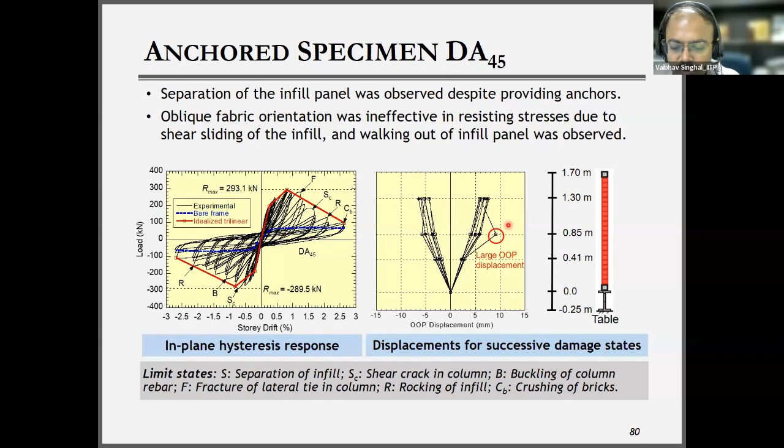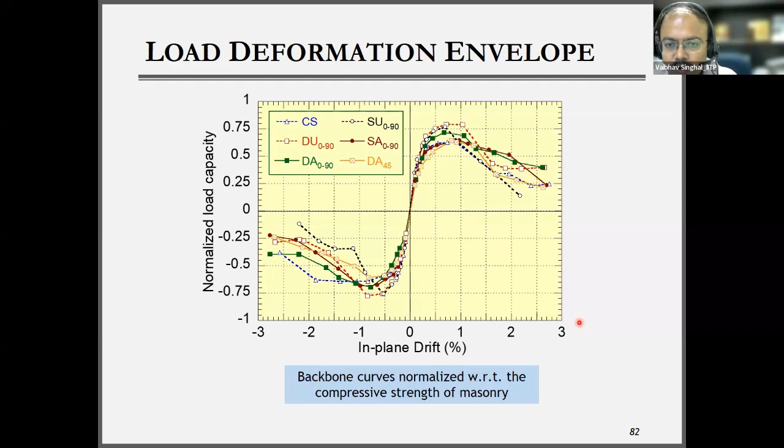The strength improvement is not so significant, but most of the improvement we have seen is in the out of plane response. The out of plane displacement has been much lower when you apply adequate strengthening, especially with the anchors. So finally,

what we have found out from these tests of masonry infill with RC frame, is that if you apply this strengthening technique, your frame with masonry infill will provide a better response. It will maintain structural integrity and better ductile behavior. Direct application has shown better performance compared to the sandwich one.

And of course, the mechanical anchors are helpful. Mechanical anchors avoid the early separation of the wall from the frame, and improve the efficiency of the FRCM. The oblique orientation was effective in increasing the strength, but it was not as effective compared to the orthogonal orientation, because it led to overstressing of the fabric, causing large out of plane deformations.

Now, the final concluding remarks are that this type of strengthening technique, the reinforced cementitious matrix, is quite promising. It is easy to implement, but we need to do a lot of work, especially to find out what could be the acceptance criteria for designing these reinforced cementitious matrices, in terms of the effective strain and effective stress they can take, because the effective stress or strain will depend on the interaction of the reinforcing material within the cementitious matrix, and also the interaction of this reinforced cementitious matrix with the substrate.

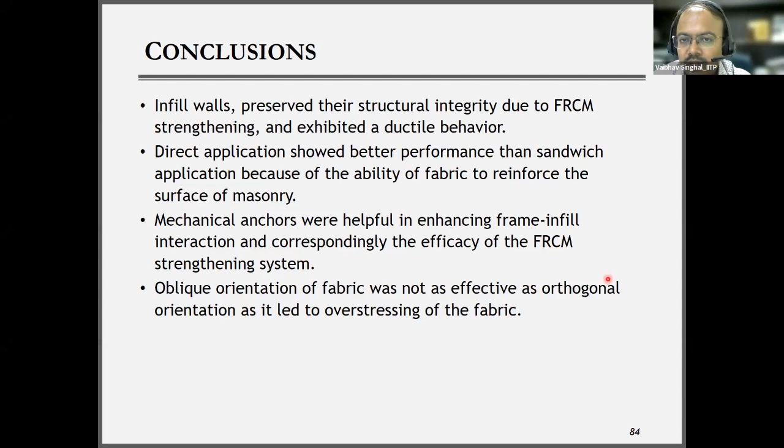So it is important to perform some tests to find out the property, and one can also do some small tests to evaluate how these strengthening techniques should improve the performance of masonry or any other structural component. And then finally, if facilities are available, you can do tests on the masonry walls or other components to see the level of improvement or understand the behavior of these strengthening techniques.

So I will stop here. I think I am almost on time. So if there are any questions, any discussion, I will be more than happy to answer.